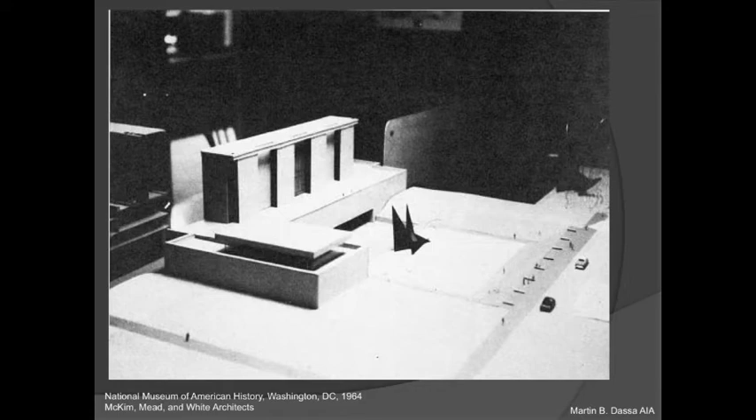This is a model of Alexander Calder's sculpture placed in a reflecting pool. I built the model of both the sculpture and the building itself. He came to the office and played with paper clips, which everybody stole. I was taking photographs, so I didn't have an opportunity to get one of them.

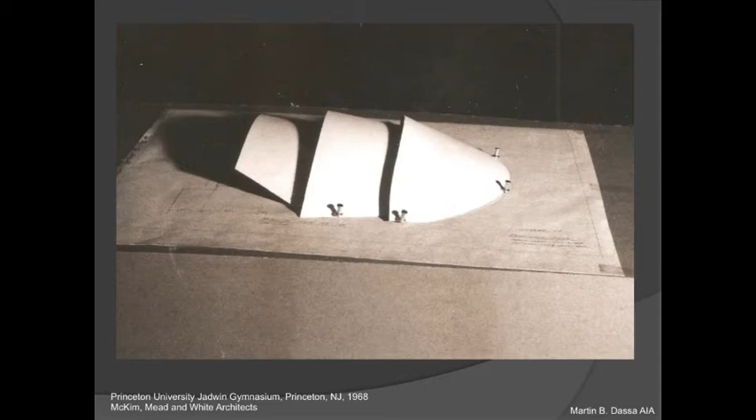This is a model of the Jadwin Gymnasium, built over a drawing I did showing a round building. One of the partners, John Farron, and John Farrell came up with this three-tier shell, which houses the track, the basketball, and then the stands.

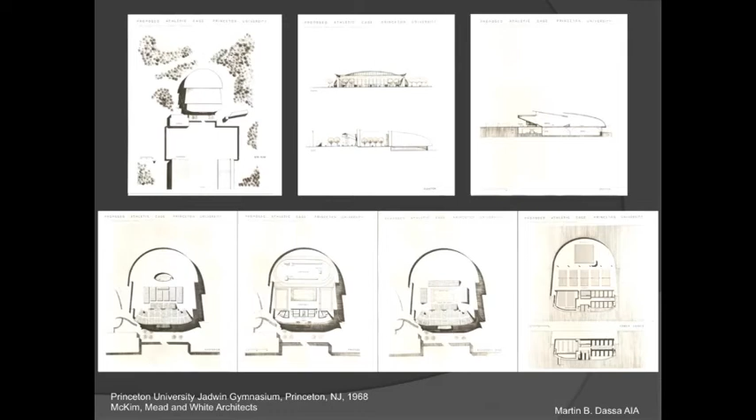These are presentation drawings that I prepared to sell the concept to the Board of Trustees. It shows the various arrangements of the plan and how well each piece fits into the other. The approval was forthcoming right after the presentation.

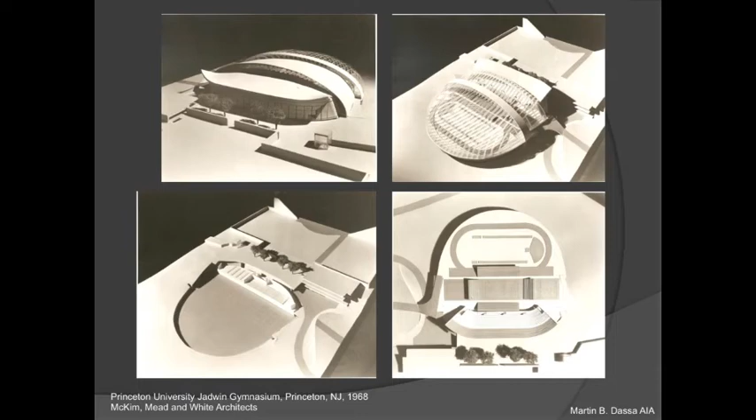This is a plexiglass model that I built of that concept. I went to all of these very high profile meetings because I was the only one that could put the thing together and take it apart. I made it on the hot plate from the senior partner. He wasn't happy that I was using his kitchen as a model shop.

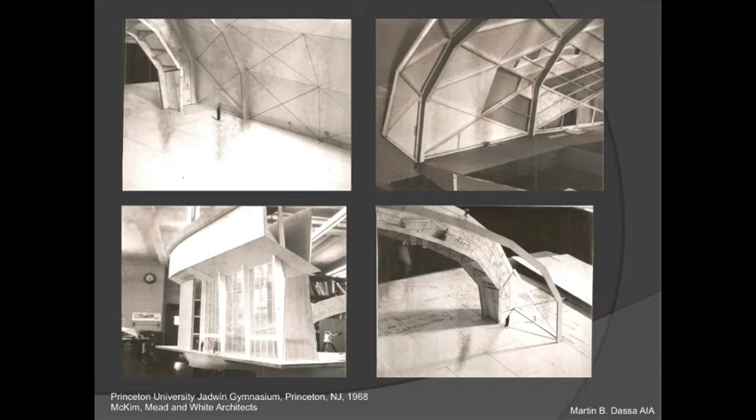But now these are components that we built of the roof structure, and this is before computers. We had to be sure that we could see by the structure to the people running around the track.

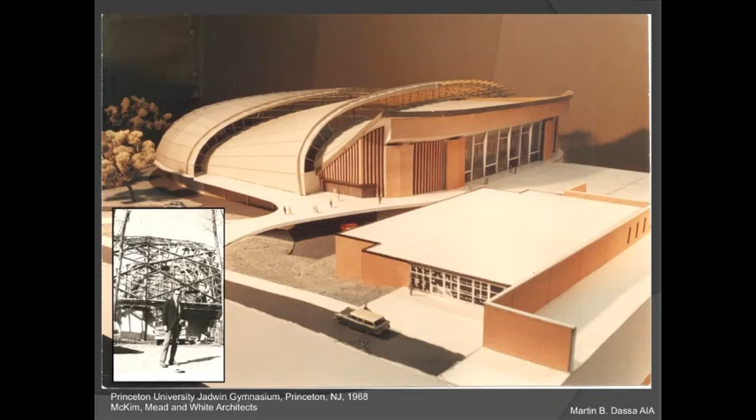So we used sewing thread from the last seat to the last person running around the track, and then adjusted the structure. There's another photograph taken in 1968 while the structure was going up.

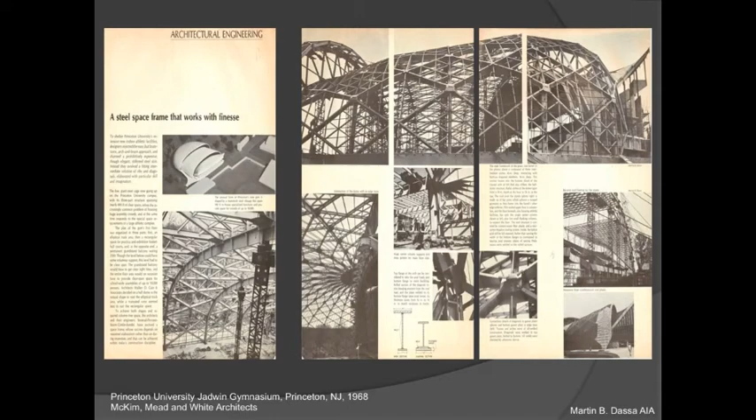These are photographs that I took that were published in an architectural record of the structure going up. Various components going together with the structural steel, made in Elmira. They transported everything on flatbeds, attaching wheels to steel, welding and disassembling it.

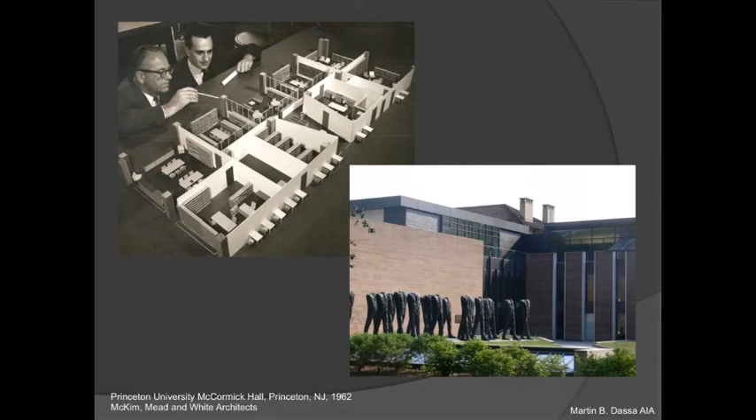This is the final building on the right-hand side, and you could see the sketch model at the upper left-hand corner. The building has been re-roofed, which seems hard for me to believe. There's a photograph of Walker O. Cain, who's a senior partner I worked with.

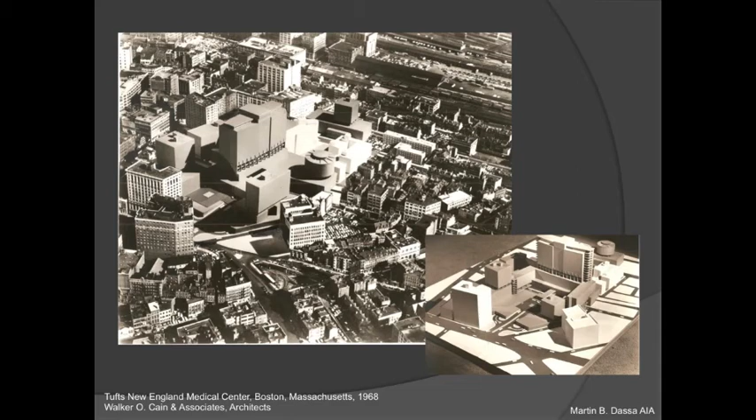I find this the most interesting. I built the model on the right lower corner. Then we had a photographer fly in a plane, take a picture of Boston. He then cut the negative out and inserted the model into the negative. This is before Photoshop, and we just did things differently.

This is a building I worked on, a lower picture, 1993, 1983. There's a Tiffany factory building.

We took the second floor out, built 4 levels within this structure, then put the dormer, and you could see starting at the upper part, the holes cut in the roof. This is the floor plan.

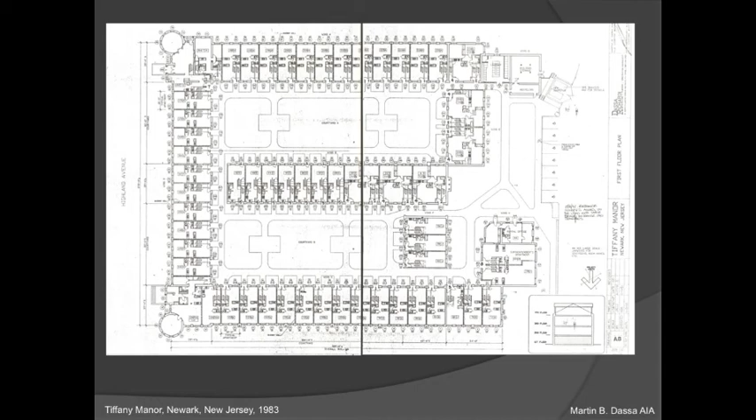The building was the first electrified factory in the country. The building was on a spacing of 9 feet wide by 38 feet deep. They weren't sure that electricity would last, so they built it so that you'd have windows with light coming in on all sides.

This is a cross-section through the building. I did all of these drawings, and it shows a dotted line where the second floor was taken out and the 4 levels were added.

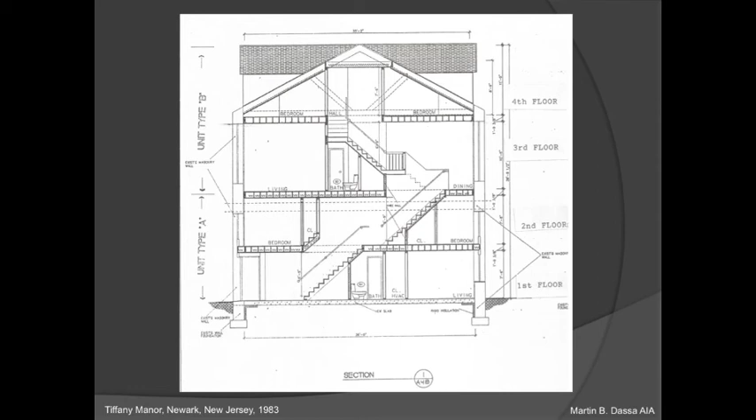The only caveat that the structural engineer told me when I told him I was removing the floor was that I had to take the windows out also so that wind could blow through the building and not tear it down. This is a building I bought on Congress Street, which I still own, 749 Congress Street.

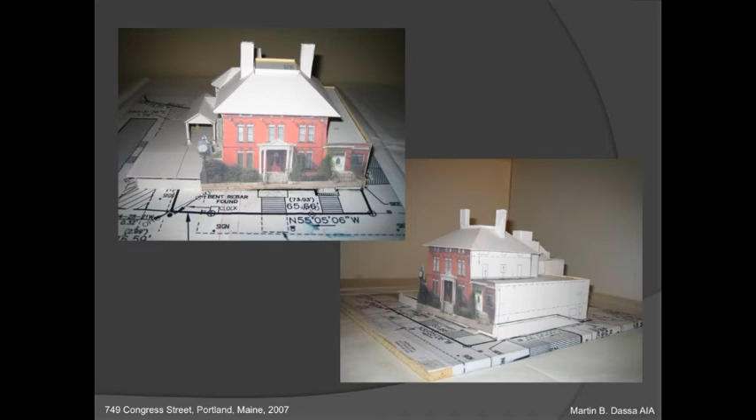I renovated the carriage house. I've gotten approval from the Historic Preservation Commission to do an alteration on the back, and knowing that I was going to go forward with this, I felt that the best way to explain it would be to build a model of the building. So, old dogs don't learn new tricks.

So this is a model, and it shows a copy of the photograph where the elevation of the building is and the clock. Used to be the Hay Peabody Funeral Home building.

I went through several different ways of handling the back of the building. The picture on the left shows the building as it exists today. The picture on the right is with an addition on the back.

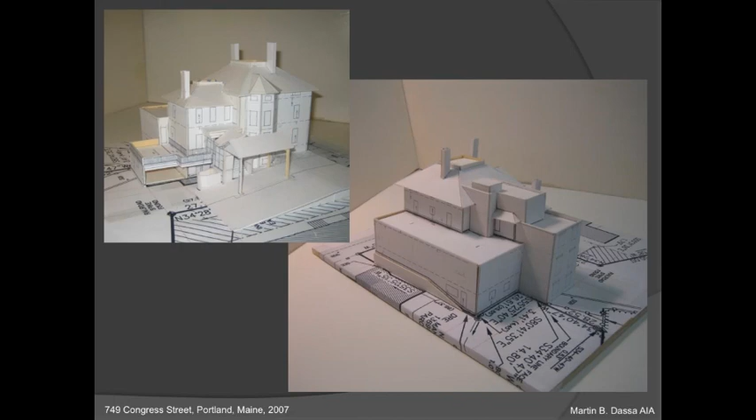Got approval on the first submission before the Historic Board because they understood what it was I was planning on doing. The model is still being used today as we work forward with the project. Thank you.

I so love Martin's presentation because it has to do with a model building. We do that in the theater to make sure that the directors are going to know exactly what they get, so we build scale models, and it's so interesting that the same thing, Martin used his models at the construction site, and they're so useful.